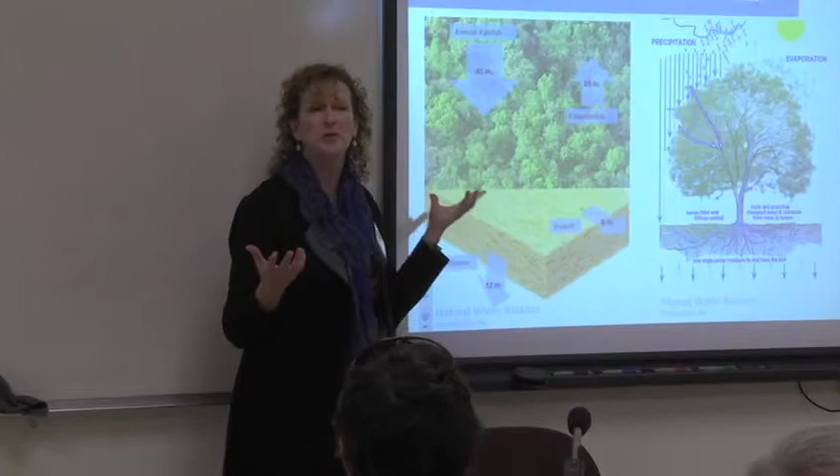I'm going to talk about this idea of green infrastructure. Our built environments are going to work like forests. Even as we build things, we're going to maintain our natural balance of water with our 45 plus or minus inches of rain and create these spongy landscapes that hold our water. Nothing works like a tree for that. So our engineering is informed by nature.

By now we're all familiar with all the kinds of best management practices we can do. We're rain gardened to death. We all know about porous pavement, reusing water in cisterns like out at Stroud, stormwater tree trenches, and on and on. We know these things are out there and we know they work. Many of us are familiar with practices of protecting things and building things, whether it's riparian forested buffers or restoring meadows, but changes in landscape and protection of natural features have a huge impact on the amount of runoff and our water quality. We know these things work too.

So why aren't we doing more of this? Why aren't we seeing this in our development projects? I'm in practice as a civil engineer, and in our firm, most of our work is related to sustainability projects. We do a lot of land development, but with a sustainable approach, like the Stroud Research Center, projects for universities, some commercial land development, but we're always working to do better stormwater, better land development.

We've learned that there are a lot of real challenges that many of you have encountered that come down to local codes, zoning and ordinances - that's a big one. Especially the stormwater ordinances, the permits and the timelines for approvals, because when you're working on a development project, whether you're Toll Brothers or the University of Pennsylvania, you have a time frame and a budget, and you have financing, and you have to move your project forward. You can't get delayed in your approval process, which goes back to codes and the stormwater ordinance.

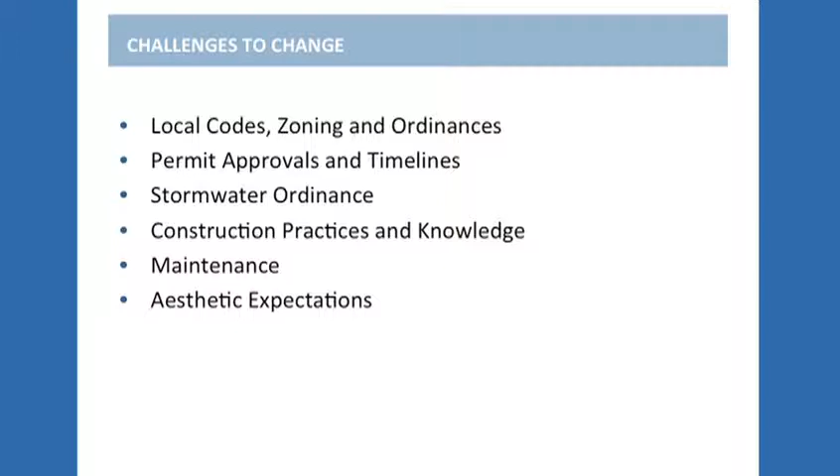And then once we get a good project design, do we have experience in the construction community on how to build things and build them properly, and then how to take care of them. And then, of course, the aesthetic expectations - what are things going to look like?

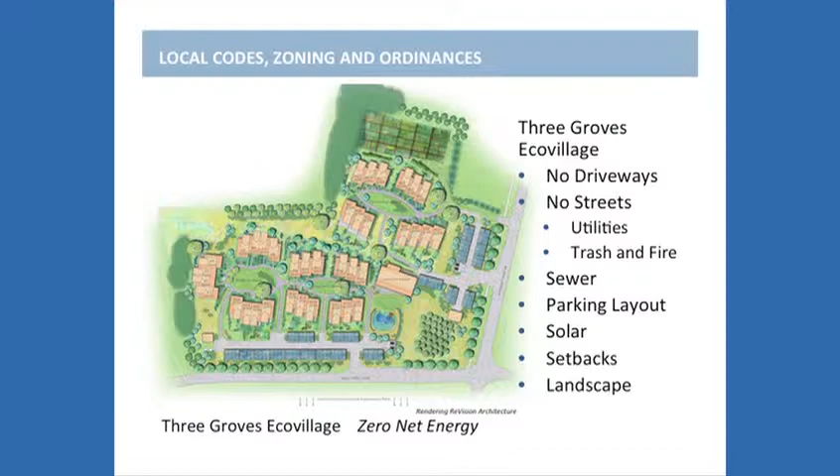Another thing is this community wanted to have the wastewater system. The local municipal authority had just built giant spray fields and a treatment system, which the spray fields are great, but they had lost a lot of their customers with the economic downturn in 2007. A lot of developments that were supposed to be built weren't built, and so they had all this capacity in their wastewater system. So they were very anxious to have a live customer who would buy sewer service. So they didn't want an on-site sewer system at this facility.

So that was a huge cost and a huge expense, and then running easements through the property for all the utilities. So these are the kinds of things that come up for real projects when you want to do something different and more ecological. This one's about to be built this summer, and they're still selling units if anybody is looking for a place to live.

When things like this come up, not just the eco-village, but the obstacles in your ordinances, I don't know how many here are familiar with the EPA SCORECARD. Is anybody familiar with this tool? Some of you, okay. This is a very good tool.

It's a rating system put together by EPA, and it's not perfect, but it walks municipalities through their ordinances, everything from what are they protecting or not protecting, to their actual codes for how we build streets, how we build lots. It's a good rating system that lets you rate where your municipality is now, and then make changes in your ordinances and come back and re-rate and see how you're doing. It's a very good working tool. So that's something that can help with the municipal ordinances.

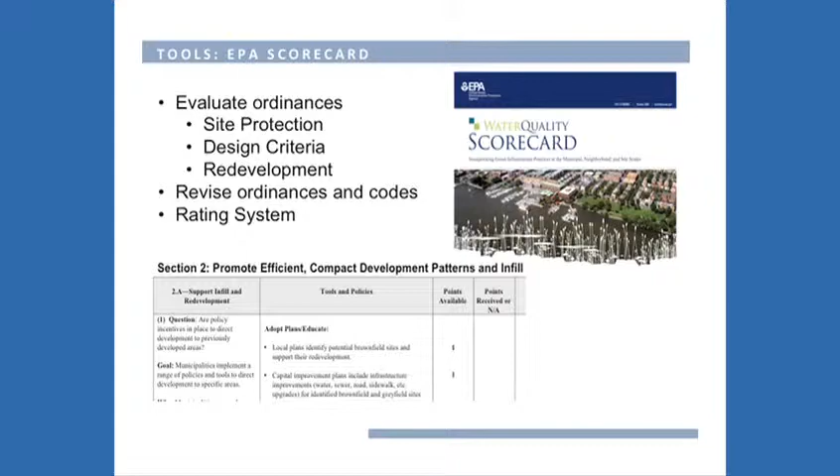The big one we see is the stormwater ordinance, and I'm going to have a few technical slides, not too many, I promise. But stormwater is a big issue with our ordinances at the municipal level, and I think, in my experience, it's the municipal ordinances that are getting in the way of better stormwater management, even in townships that are trying to do the right thing. I see a lot of people nodding their heads because they've been through this, they know this.

Even in townships where we're requiring volume control, we still have antiquated requirements for peak flow rates. And the way engineers calculate those peak flow rates is getting in our way. Now, everybody knows that if it rains really hard, the water's going to run off really fast. Common sense, potentially. But the way engineers are calculating that, we're assuming the very worst rainfall intensity, inches per hour, how fast it's raining. And we use that to say what's safe before development.

So we assume the worst condition, come up with a very high flow rate before development when it's in woods or meadow, and then we say that's what our streams and our channels can handle, and that's way more water than our streams and channels can handle. Other things, we don't get credit for better landscape practices, and a lot of places existing impervious is grandfathered. If it's already built out, you don't have to make it better.

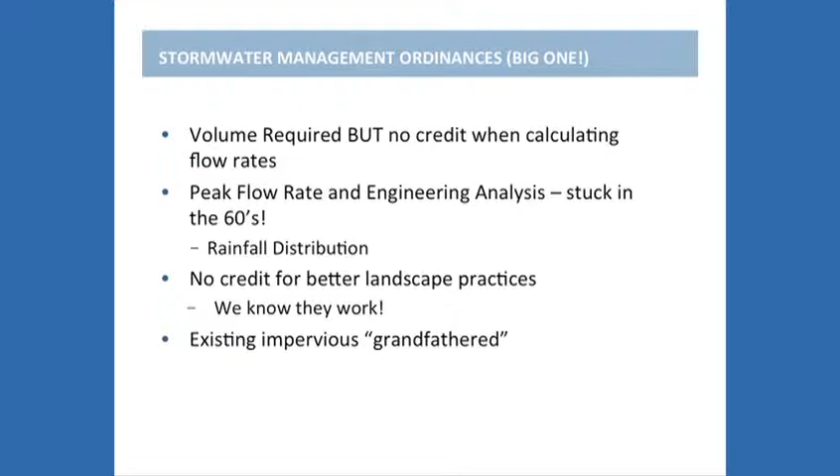So going through some of these, we're all familiar with the idea that most of the rainfall happens in the small storms, both in terms of volume and frequency, and we've recently updated this.

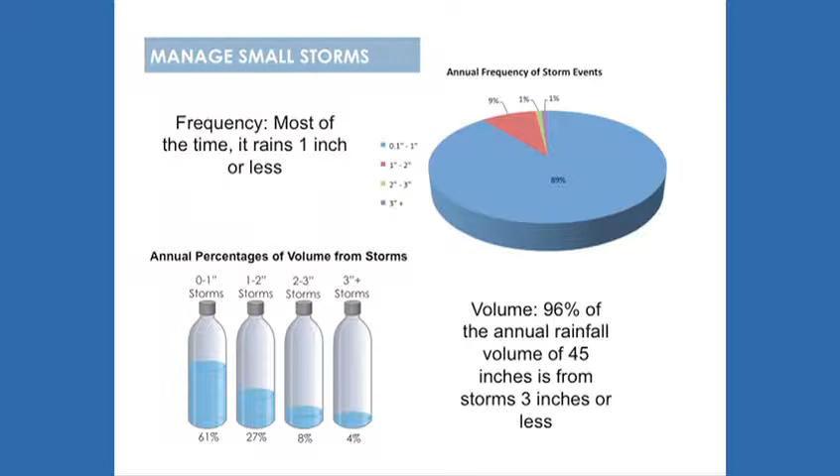Come on, screen. Huh. Okay, well, we've recently updated this with more recent data from the, come on, screen. Just touch it. Just touch the screen. Just touch it. There it goes.

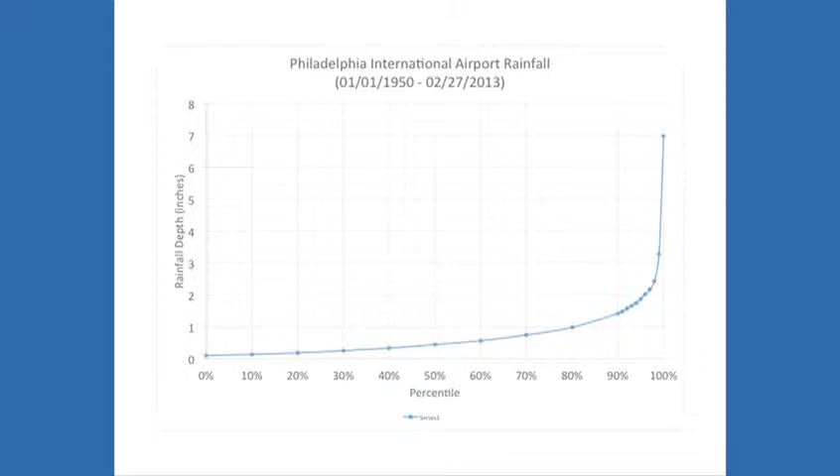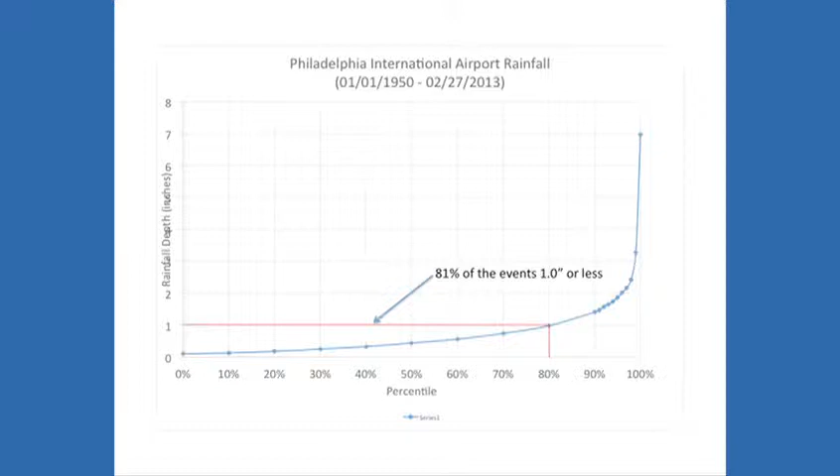It's interesting. And yeah, 81% is 1 inch or less for Philadelphia. So these are our small rainfall events that we're all familiar with. And those extreme events, you can see how far they go. And if you want to go to the next one, Clay, thank you.

But here's the problem. When we talk about these big rainfall events, 100-year, 10, 2-year, and engineers calculate flow rates, you say, okay, 100 years, 8-inch storm, but how does that rain occur? And we use an artificial rainfall distribution that basically assumes most of the rain happens in 1 hour. So it drizzles, drizzles, drizzles, rains like the dickens, and drizzles. It doesn't really happen like that when it rains.

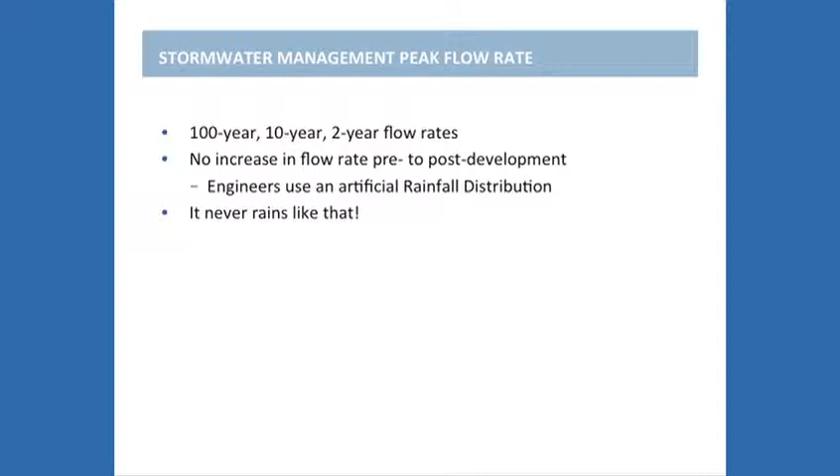We do get rainfall intensities that high, but the maximum on record is associated with something more like a 2-year storm. And if you think about summer thunderstorms, that's when you see your big rainfall intensity, not as much volume. So if you don't mind hitting it, Clay. Yeah, and going on to the next one. And so that's why we're letting too much out.

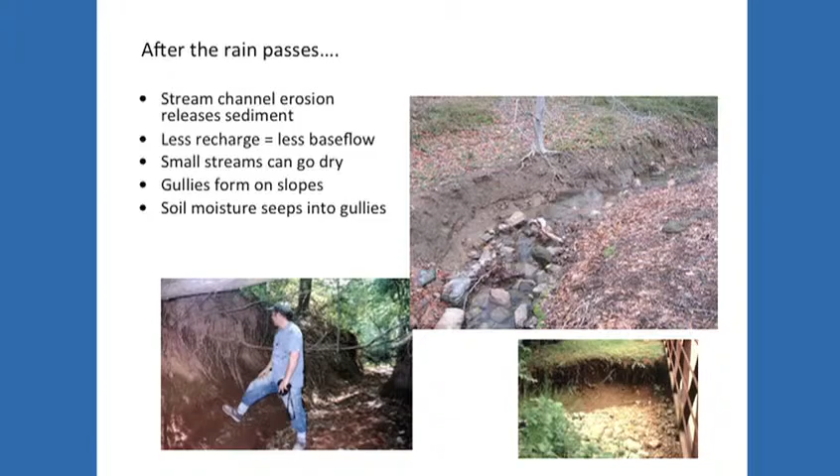Keep going to the next one, and we see our stream channels eroded. We're not being safe with our flow rates either. It's not just volume, but our flow rates for the big storms are too much. We'll go to the next one. And this has consequences for how we design. And as someone who's trying to do green infrastructure, it kills me when it has a bad impact on our projects.

So this is a project at the Mann Music Center where we had 2 big bioretention areas, but the lower one, we were required to adjust it to design for these large storms in a flow rate that'll never happen. And so the way we did that is it got pushed down to look more like a basin. So the upper bioretention area is lovely, and it's growing in, but the lower one was pushed down. And so we see the side slopes eroding, we see sediment, you can see the structures. It doesn't have nearly the same aesthetic, and it'll never fill up with water. You'll never see that thing filled up.

The engineering calculations are forcing us into designs. But we see projects doing this to get through the permitting process. Because if that's what's in your rules and you got to get a permit, you're going to do that. And so that's an obstacle we see a lot of. If you don't mind going to the next one.

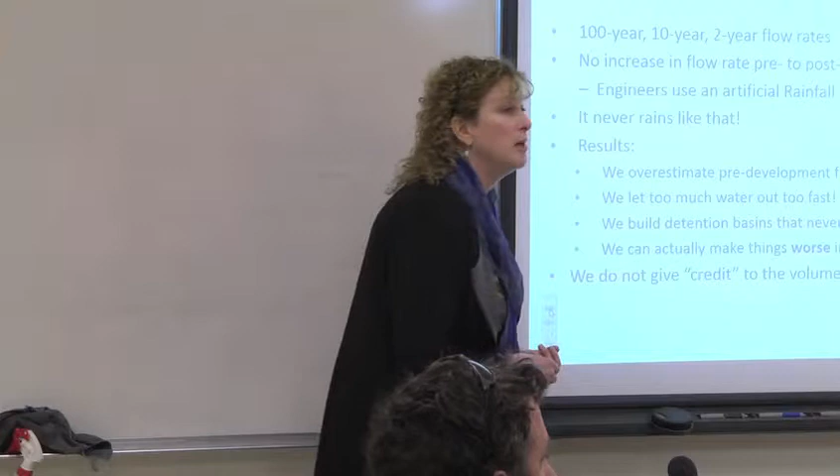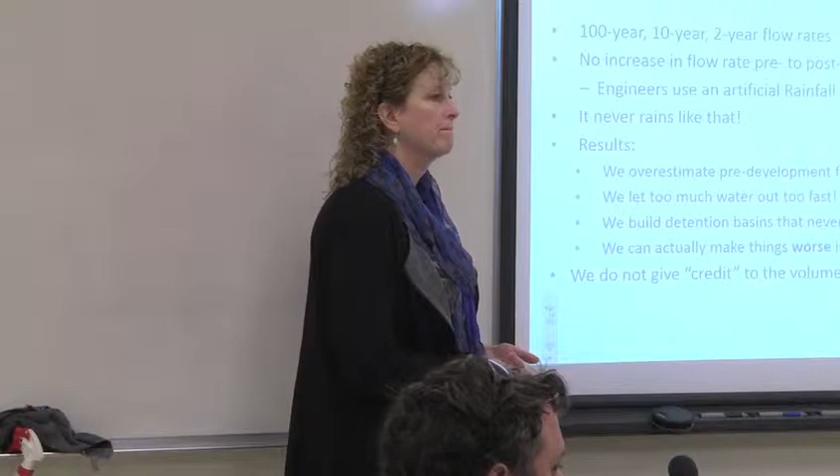Excuse me, Michele, is that in the city of Philadelphia? Yeah. That's at the Mann Music Center. You can see both of those in the city of Philadelphia. I'm sorry. Yeah, at the Mann Music Center in Fairmount Park. Could you just say again what it was about the one that's not performing? That the code said one thing and it's not really performing. The code, well, it's performing.

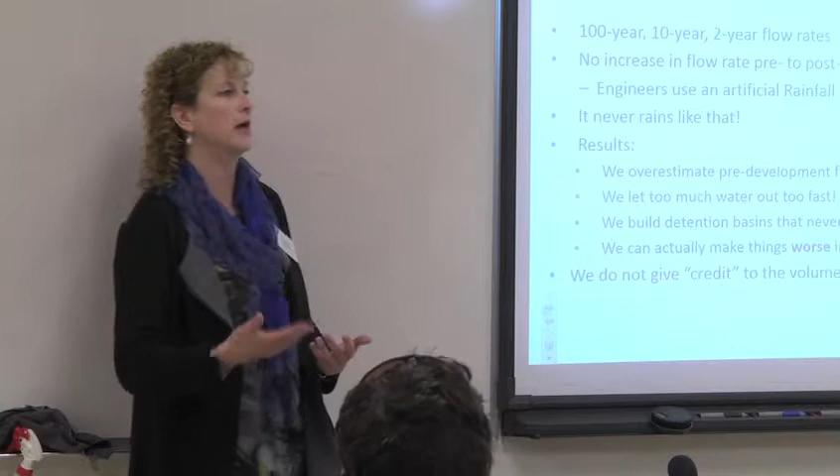It's holding volume, but the code said we had it designed for these very high flow rates that never happen in reality. And the engineering methodology, the way engineers calculate that, forces a big basin. And so we got a bigger basin by pushing it deeper. We see that all the time. And then the sides are too steep. And then in construction, it eroded on the sides, and the plants didn't do as well. All those things we see over and over again in actual installations are coming out of our engineering codes, I think. Oh, yeah, Shadi.

Then the Mann Music Center probably comes to you and says, come back, this isn't working, fix it. This is ugly. Yeah, this is ugly. So how do you handle that? What do you do? Well, we don't have a way of fixing having to make it deeper. We can come back and make the plants a little better. We can do plants that grow higher, so you hide the ugly sides.

But if you don't mind going back one more, Clay, sorry. Thanks for jumping in and being a tech assistant.

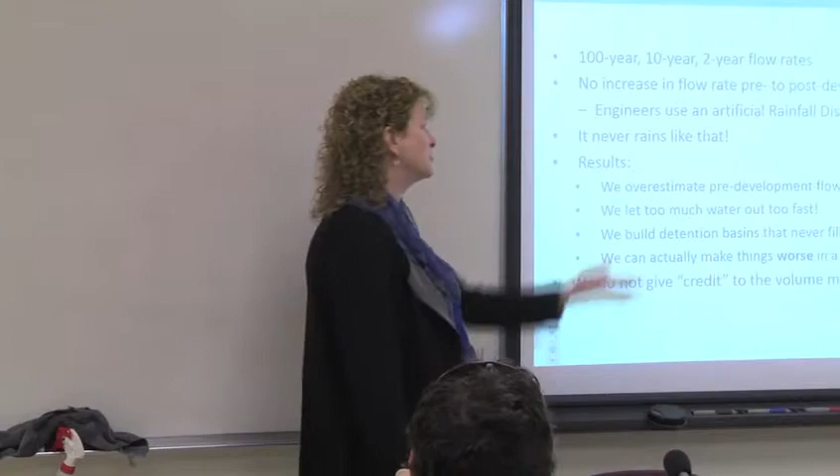If you can see the difference between that and that at the same project site, and the client wants this, putting in bigger plants is going to make that harder to maintain, not the same aesthetic. And this is right on the drive as you're driving into the Mann, so it's very visible. And they want it to be a nice landscape. So this is a real challenge. If you're trying to stay in business as a designer, you don't want your projects to be ugly. You won't get more work.

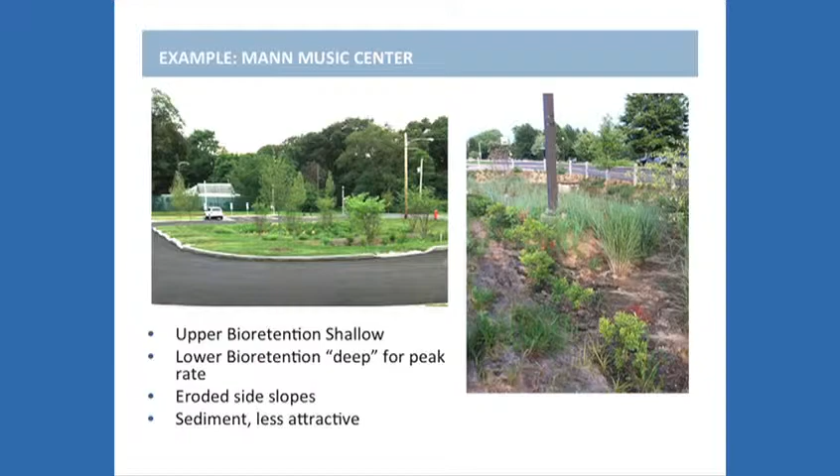So an alternative to that one, not that we shouldn't push back against the silly codes, but an alternative to that is it would have to have a bigger footprint. Right. Yes. So you didn't get the storage by having a deeper system. Thank you, Joe. And if we made the footprint bigger, this is at the bottom of an existing parking lot. It was a retrofit. They would lose more parking. They could not lose more parking. So that's a great question. These are the real things you bump up against in real projects.

So, thanks, Clay. And the other part is when we do all this volume management through our BMPs, we don't give credit to that volume management when we're calculating our flow rates. You calculate your flow rates as if there is almost no volume management. They're kind of separate universes. If you don't mind going to the next one.

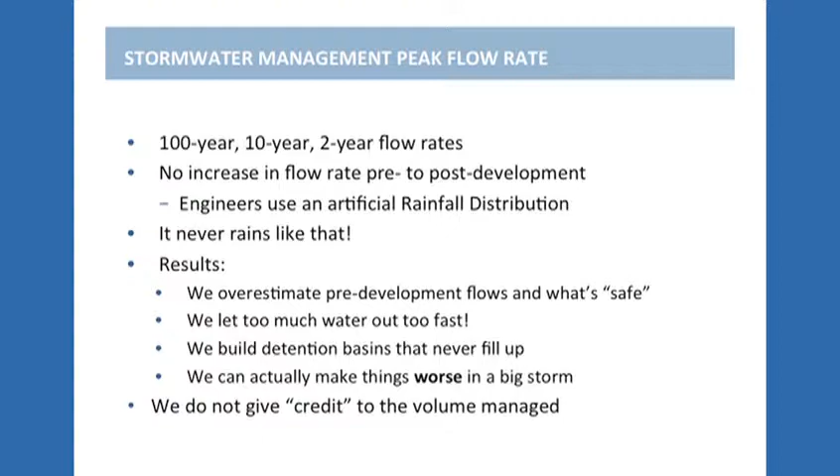There are ways to overcome this. The state of Maryland has done a good job. They came up with a method to work within the methodologies that engineers are used to, the curve number method, and they have lookup charts, and as you have your percent impervious and you start managing your runoff volume, you get to adjust your curve number on these lookup tables. So even the engineers don't have to do the math, they can use lookup tables.

And the goal, that's important, the goal is to get to a curve number which represents your land use that's closer to forest in good condition. And if you get to forest in good condition, you're good. You don't have to do a lot of your flow rate calculations, your peak flow rate mitigation, because you've managed your volume well. And they've also brought the storm down. They don't usually take it up to the 25, 50, 100-year storms. It's not perfect, but it's helping.

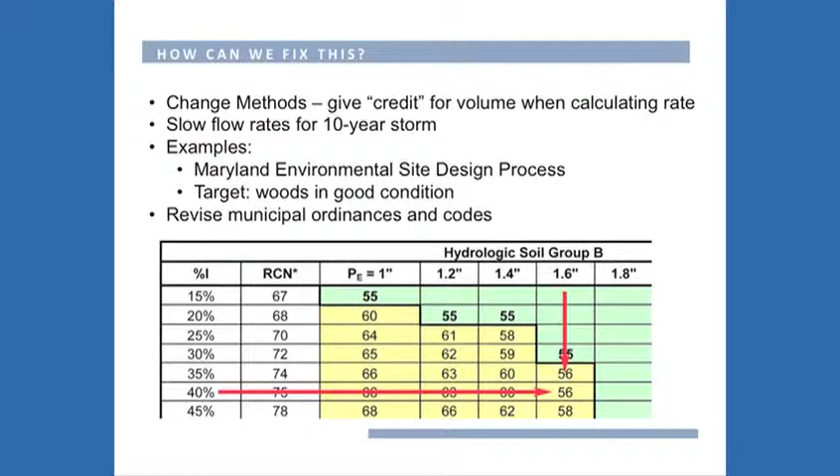Any chance that this might come to Pennsylvania? Well, hopefully. You know, there's this committee working to update the manual by volunteer methods, and Dominic Rocco at DEP has been involved, and we're proposing that Pennsylvania bring it into the manual. It would still need to come into the municipal codes, because as a designer, when you go get your permits, you can get a permit from DEP, not too hard, I don't want to offend anybody. Getting your municipal permits is hard. So you're gonna defer to the municipal rules. So we have to change municipal ordinances. That's a great question. Yeah, Wes?

And would you go so far as to say that because of this perverse peaking methodology and set of requirements, it actually starts making the whole design, including achieving the volume control, that much more difficult, maybe even absurd, certainly more expensive, and so it really perverts the whole design process?

Exactly, Wes, because you know this exactly. It perverts the design process, and you end up spending time and money and construction costs on things that aren't needed, that aren't ever going to do anything. The Eco Village project I showed you at the first one, we proposed using this alternative methodology. DEP was good with it. DEP said, yeah, let's give it a try.

The municipality said, we're really worried, we don't want to be liable, we don't think so. What we did in our office is we did the modeling and we ran actual hurricanes. We said, okay, here's a design storm, but here's what would happen if Floyd happened again, if we designed it the way your code said. And we showed it would actually make things worse. And the municipal engineer said, Uncle, okay, do it your way, can't be worse.

But it's hard for engineers and owners to do that. There's no money to do that.

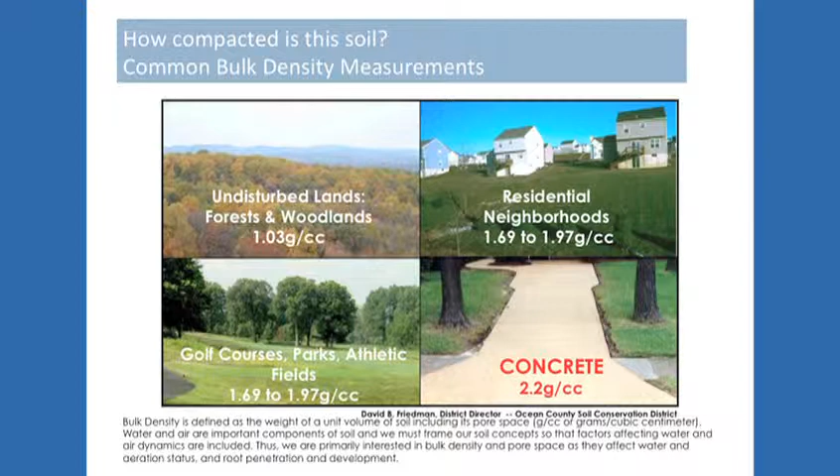So another important thing, our landscape practices. In our engineering methodology, we don't give them enough credit, and we know they work, but it isn't represented when you do the math to get your permits. We treat them all the same. And we don't take into account the fact that uncompacted soils, woods, and good landscapes absorb water so well, and our golf courses and lawns are almost as compact as concrete. They don't absorb water.

An example I'll share with you is down at the University of Pennsylvania. This is an urban example. This is the new plaza Penn built between the Palestra and their stadium. It used to be all impervious and tennis courts, and they built a whole new plaza there. It's quite beautiful, and it has to follow the City of Philadelphia stormwater requirements, which are very rigorous and very good.

So it had a number of goals. This is actually a SITES pilot project. If anyone's familiar with SITES, it's very much like LEED. It's a rating system, but for the landscape. It's a great resource, and it also has a lot of requirements about site protection and site restoration and understanding your resources. So SITES is a great tool. This is a pilot project.

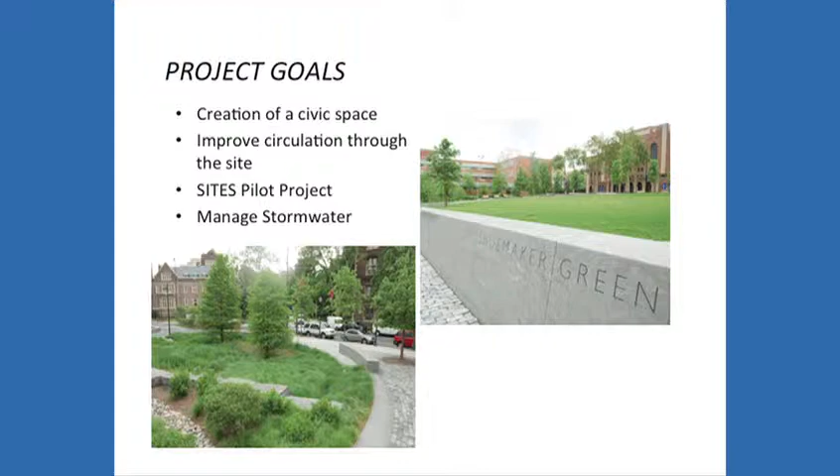So a little bit of history on the site. It's in Philly. It had been row houses before it became tennis courts by the Palestra and the stadium. There were the tennis courts right there. It's right near the Schuylkill River. You've got this landscape, the train tracks, and the Schuylkill River.

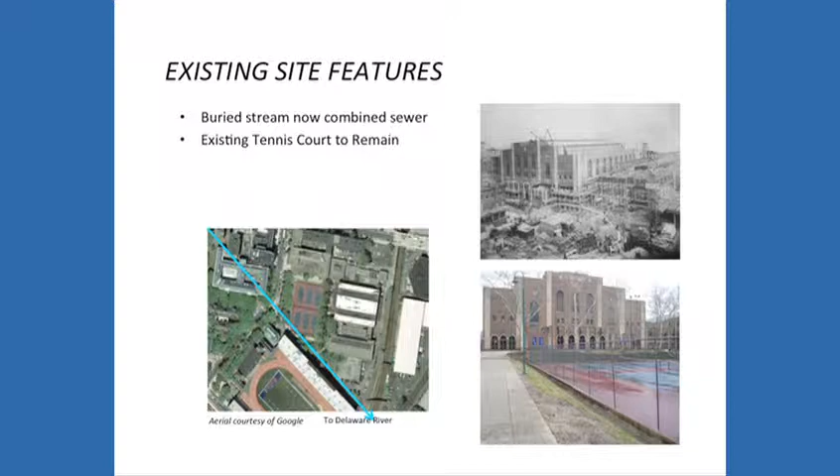It's on about 30 to 40 feet of rubble and urban fill. So when we looked underneath the tennis courts and we saw 40 feet of imploded buildings, and you could literally stand there with a fire hose and water would go away, we said this is not a place to infiltrate, because the whole thing will start settling if we start putting a lot of water here. So the whole system is lined. It does not infiltrate. There is a liner and one pipe out underneath. And there's what we saw.

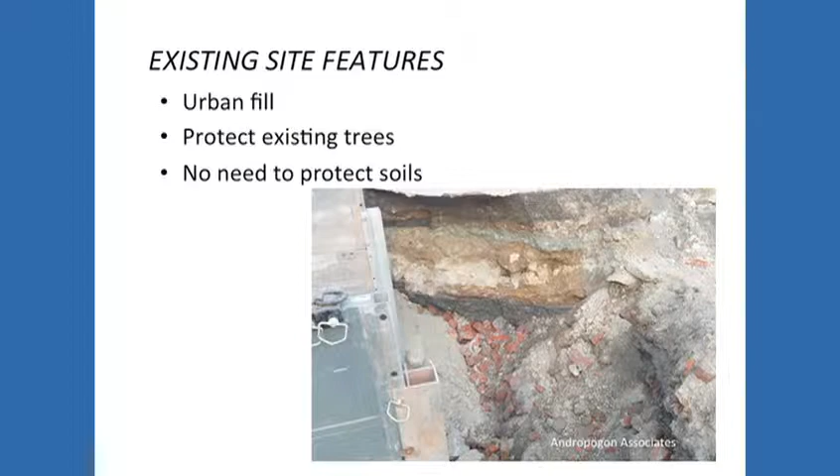There were some trees we wanted to protect, and this is urban environments. This is what you see when you dig under the ground.

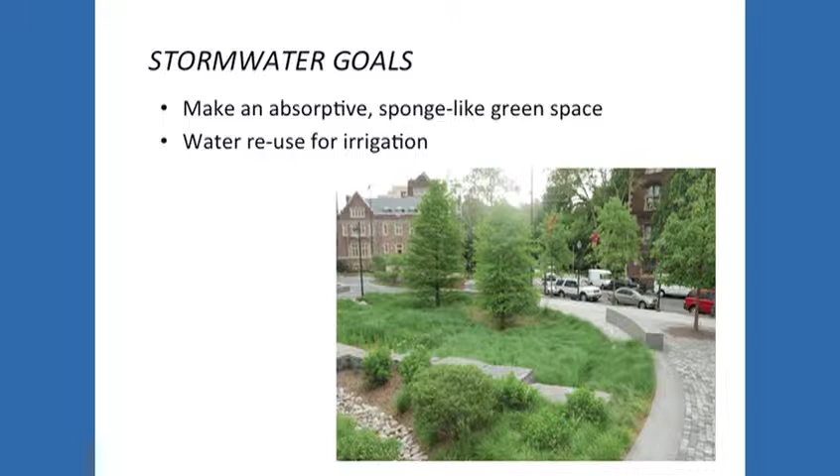So the stormwater goals were to make a sponge-like system and to hold water and reuse it for irrigation. So we have a number of components.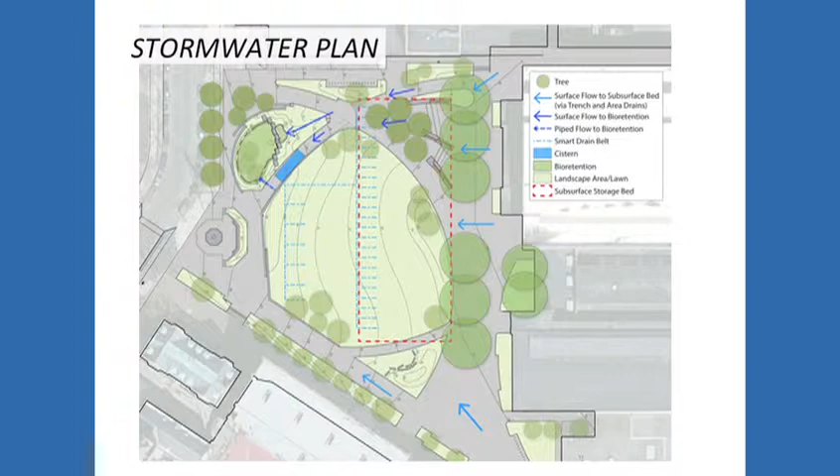And there was no soil, so it's a made soil. It's sand and compost, completely artificially constructed. And they added organic components, fungal components, so it's a made engineered soil, because you don't want to bring in topsoil from someplace else, since you're taking that resource from someplace else. And there's a cistern for the water to be reused and recirculated.

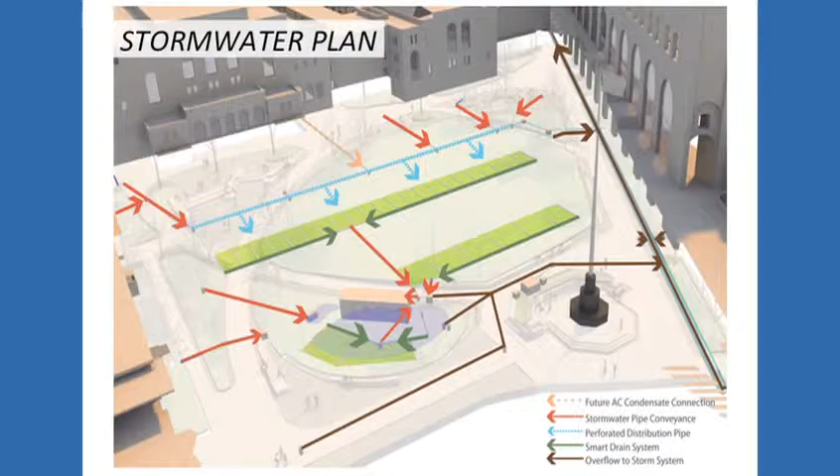And so this is just showing in 3D the plan a little better, with the distribution system and the cistern. And this is just taking the different components as you go down through the layers.

The rain garden's at the top. The rain garden, interestingly, as beautiful as it is and as photographed as it is, does almost nothing in terms of meeting regulatory requirements. It gets almost no stormwater credit in the city of Philadelphia.

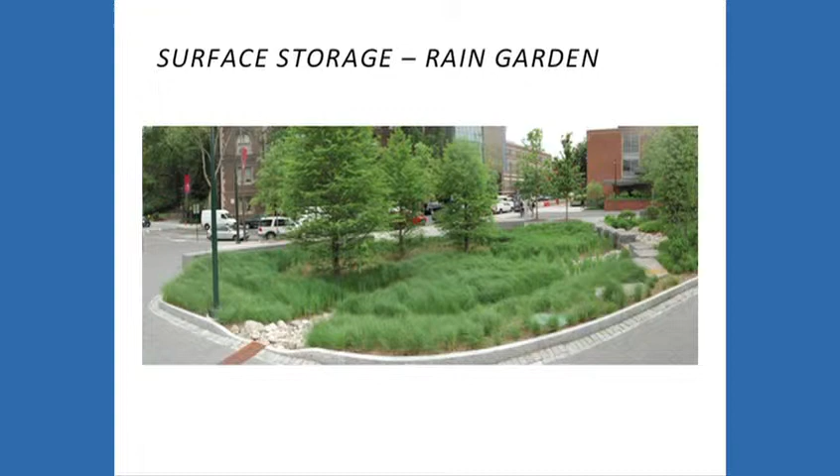We had a very hard time getting through our permitting process, and Penn, as a university, had a schedule. This had to be open for graduation. They'd had some similar experiences on other projects, and so you have a client as good as Penn who wants to do the right thing, but they have a project they have to open on time. So you get to a place where you want to have a beautiful landscape, but you end up doing underground storage tanks and things like that to get your permits. This is the reality. This is what gets in the way of good green infrastructure.

And there's just another shot. But this landscape, and there's tree trenches, yeah, that's fine. You can go all through this, is incredibly absorbent. And so it's been in place for a little over a year now, and it's got a liner underneath of it and one pipe that leaves it.

And Penn is monitoring the system. They're monitoring the soil, they're monitoring the discharge, they're monitoring the rainfall. And what they've found is in an entire year, there's been no discharge from this site because the only time there was a discharge was when the irrigation system was broken and the pumps were on. But it's holding water, pumping water around, and it's this giant sponge that evaporates. There's no discharge. It's grossly overperforming the calculations for the permit, but that evaporation really gets no credit in getting your permit.

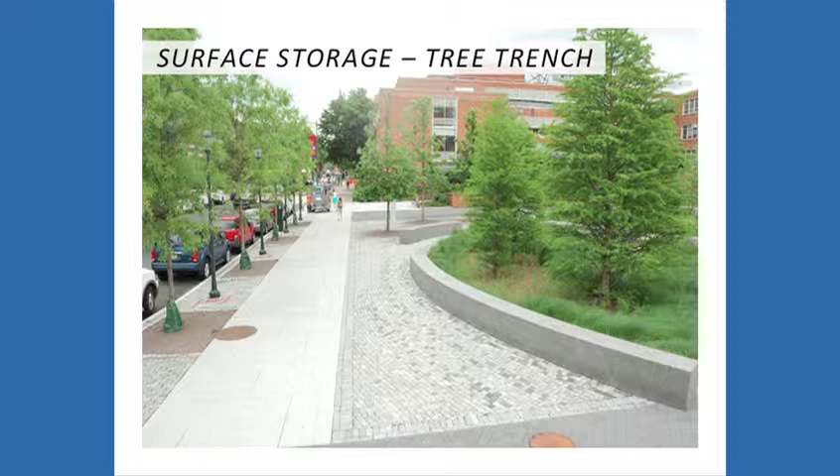And so until we close that gap of how do you quantify the benefits of something green like this when you're doing your engineering calculations and getting a permit, you don't see enough of this. So this is another obstacle. I see a lot of heads nodding. I get the feeling you've all encountered this before.

There's a little diagram showing the made soils, the stone bed, the bed underneath. And we use something called a SMARTDRAIN system. If you don't mind going to the next one, Clay.

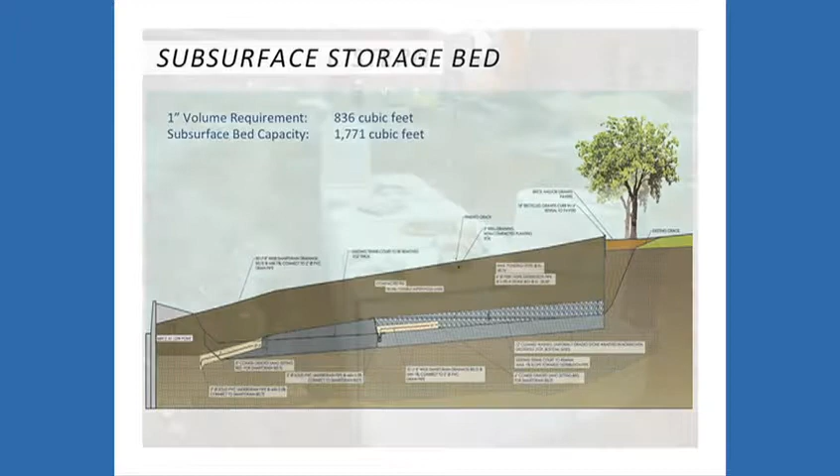But this is a SMARTDRAIN. This is the SMARTDRAIN system. These are plastic belts that work by capillary action. And so what they do is they pull the water out of the soil, but very, very, very slowly. So we've found this to be a good tool at having systems that drain, but drain very, very slowly. But this was something new to the water department, so getting that through the agencies, getting that accepted and approved is another hurdle when you want to use new technologies.

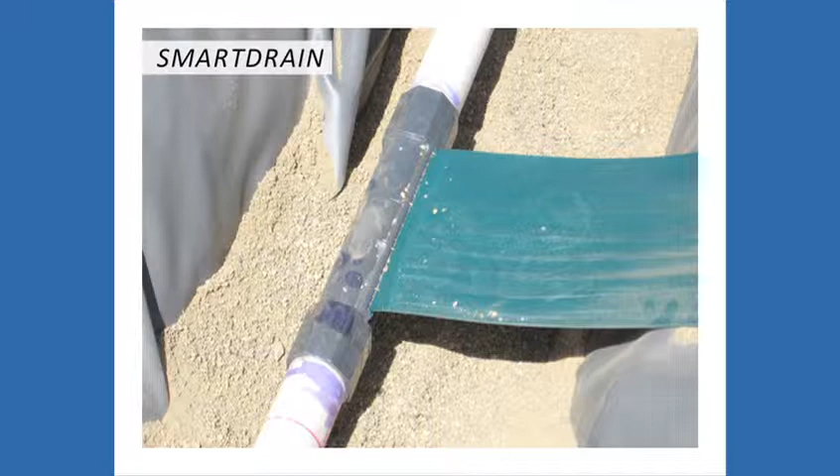If you go to the next slide, it shows the soils. This is how the SMARTDRAIN system works. We've used them on a lot of systems now. Is it an osmotic technology? It's capillary action. This is a plastic plate, and underneath are all these little grooves, like a plastic strip. The grooves pull the water by capillary action, so they can really be essentially flat. It was developed for golf courses and athletic fields. But in doing that, you are able to discharge, but very, very slowly. It's very powerful that way.

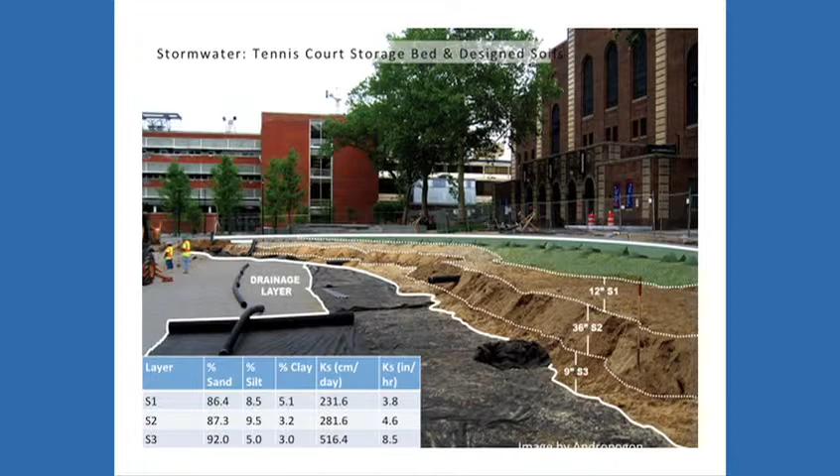And it's doing a lot for stormwater, but Penn to date hasn't gotten credit. And we didn't get credit in the permitting. Hopefully through monitoring, the campus will get more credit. A question about mowing that lawn and whether that increases compaction. What did you do about that? It is a mowed lawn. The soil scientist, Tim Craul, who you probably know, has a gradation of mostly sand particles with organic.

And the sand is graded so that it has a structural capacity without getting compacted, on these made kind of systems, when you need a lawn, because sometimes you need a lawn. So that's a good question.

Question, do you know the percentage of sand to topsoil? It's mostly sand and organic material, and Tim has a lot of that available. What we were seeing published was some of the mixes are 85% sand, high sand, 13% compost, and 2% soil. And very little soil, yeah, with different gradations of sand.

And actually, there's another source. The City of Seattle has done a lot of research through the University of Washington, and all their specifications are available on their webpage, looking at different gradations to make a lawn that's absorbent and drains. They also use the same soils for bioretention areas.

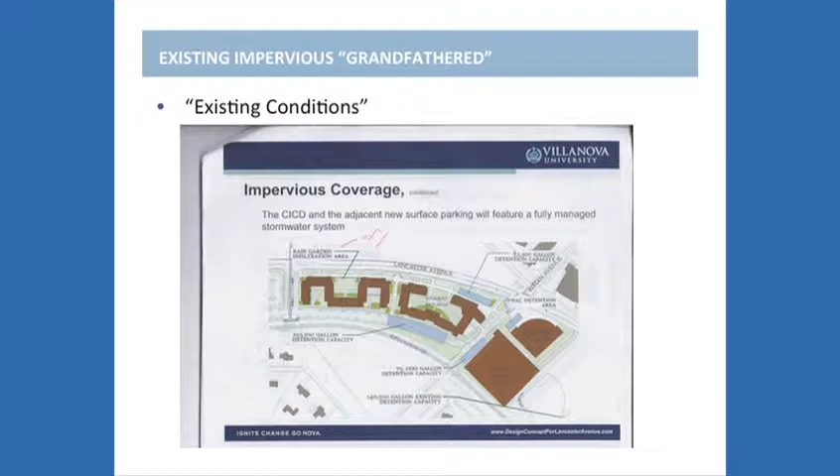The community and the Riverkeeper have been very involved in this, asking Radnor to get rid of grandfathering for existing conditions, and to manage volume, not just peak rates. We don't need more big detention facilities in the Darby, we need volume management. So that's a real issue with ordinances.

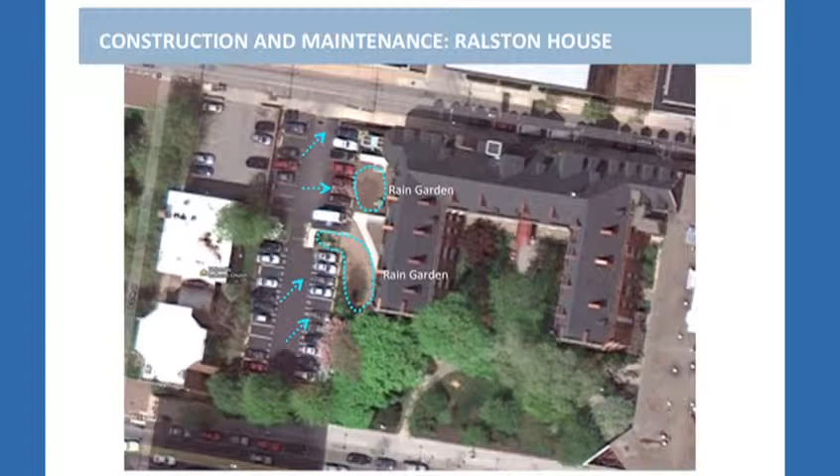So I'm going to jump over to issues related to construction and maintenance. This is a project built a few years back in two phases near the University of Pennsylvania, the Ralston Center on Chestnut Street. It's a community organization for an aging population, providing social services. Because they're very tuned into community and ecological issues, they retrofit their parking lot to put in some rain gardens.

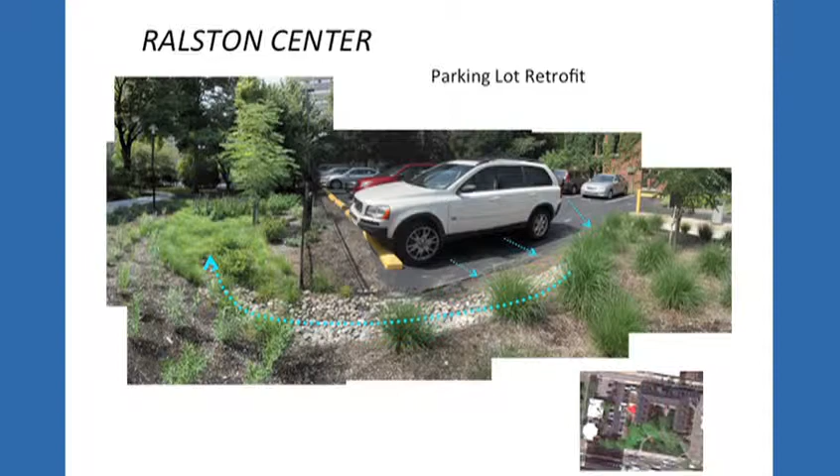And those worked pretty well. This was a retrofit for an existing parking lot, changing the landscape to make it absorb water. It continues to work, but we see that maintenance crews put in too much mulch and never take the old mulch out, so it piles up and affects drainage. We see this a lot. Maintenance crews need training that old mulch must come out, and the type of mulch matters, so water can actually get into these systems. They tend to dam them off with too much mulch, and there it is, growing in.

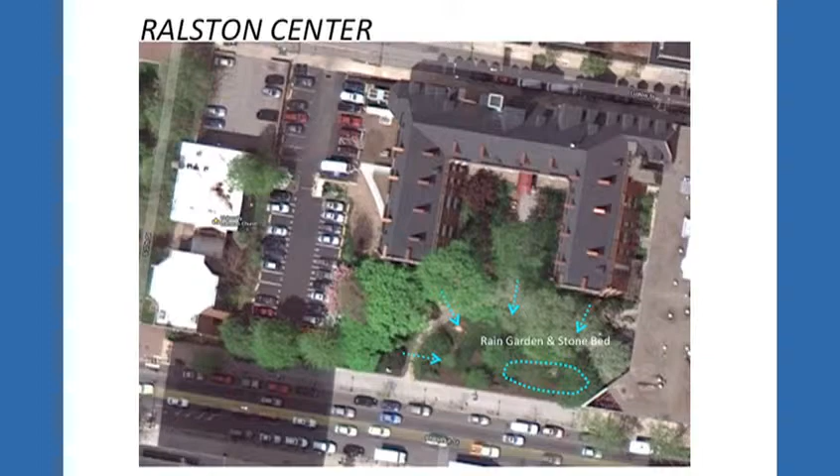They did a second project in front of their facility, retrofitting a rain garden out front. While they were putting it in, two things happened: the contractor wasn't very experienced with green infrastructure, and Hurricane Irene hit, followed by Tropical Storm Lee. So they didn't do a very good job with their erosion and sediment control measures, or with keeping their site protected.

They put the rain garden in with a stone bed underneath, and there's a stormwater inlet connection that serves as an overflow. By not having good construction practices and not keeping erosion and sediment control measures in place, too much fine sediment washed into the rain garden and formed an impermeable lens a couple inches down. You could go out to this puddle, poke a stick through it, and it would gurgle and bubble as the water went down. We see that a lot when things aren't built right.

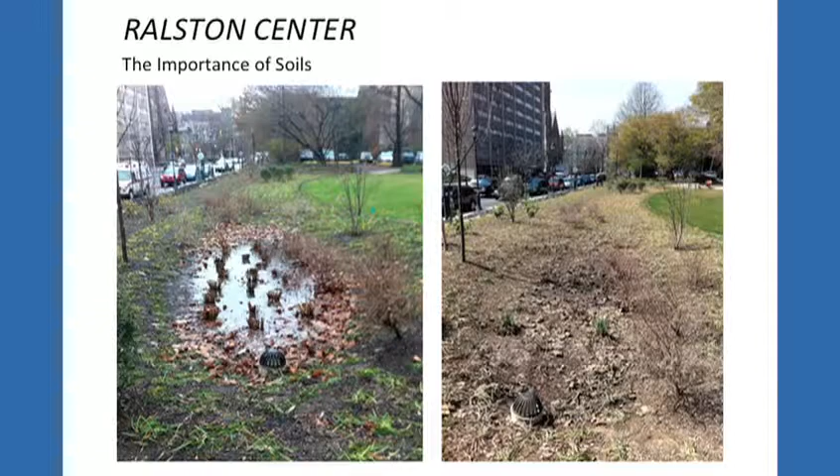The way this was fixed was to come back, dig it all out, take that material and mix it with more sand. When they restored it, it started working fine again. But that was a construction problem and an erosion and sediment control problem.

We see a lot of that. Property owners don't like to pay their engineers to be out at the site doing inspection during construction. Once they have their permits, they say thank you, have a nice day, goodbye. But if nobody's out there making sure the contractor builds things properly, they don't get built properly. We need more inspection for green infrastructure, with design professionals out there overseeing construction. If nobody's watching, you can't always count on the contractor to build it right.

Another project with similar problems is a new fire station, built in Philadelphia. It has a green roof on top, which is why it's green, a parking lot, two bioretention areas, and lots of meadow.

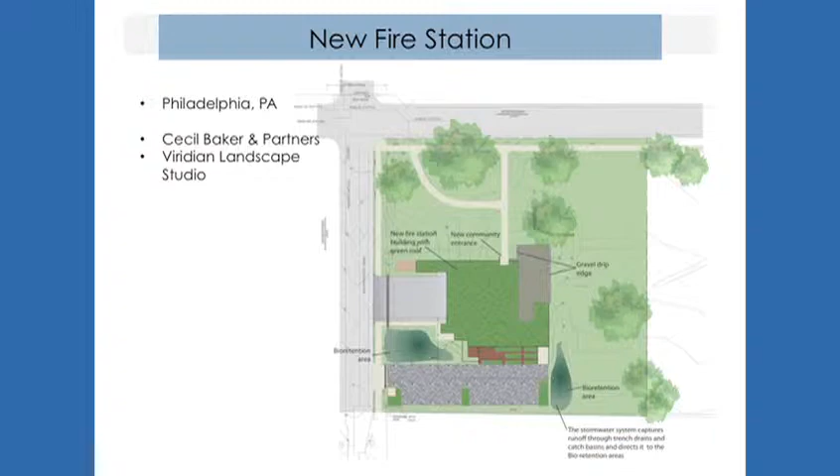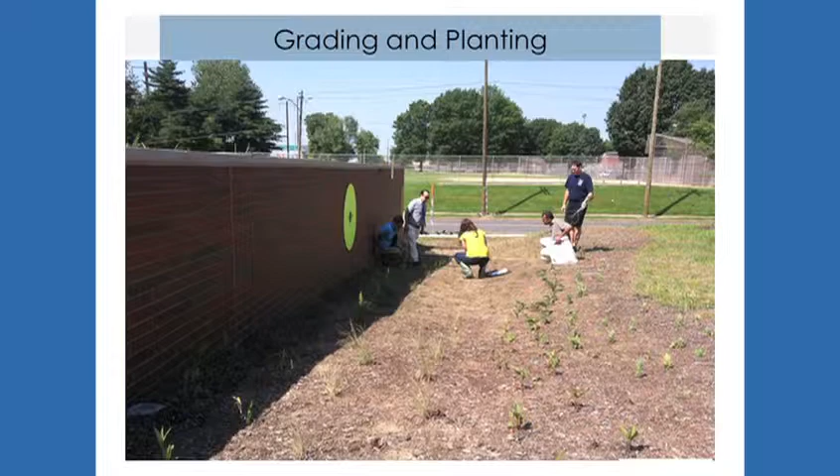But they didn't quite get the construction right, with many trades coming in and out. This is a publicly owned building going through a public building process with the Department of Public Property, which has ways of doing things that aren't very contract-friendly to alternative designs, whether a green building or a green site. Contractors didn't get the grading right, so an area that was supposed to be graded and densely planted was not. That area eroded, and runoff went right into the rain gardens.

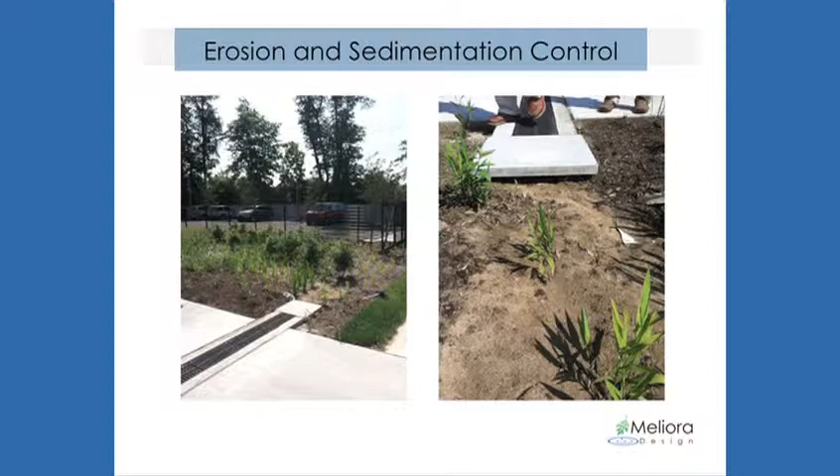Rain gardens got filled up with sediment. So again, you get a lens, keeping your water from draining. These are construction problems because nobody was out there watching during construction.

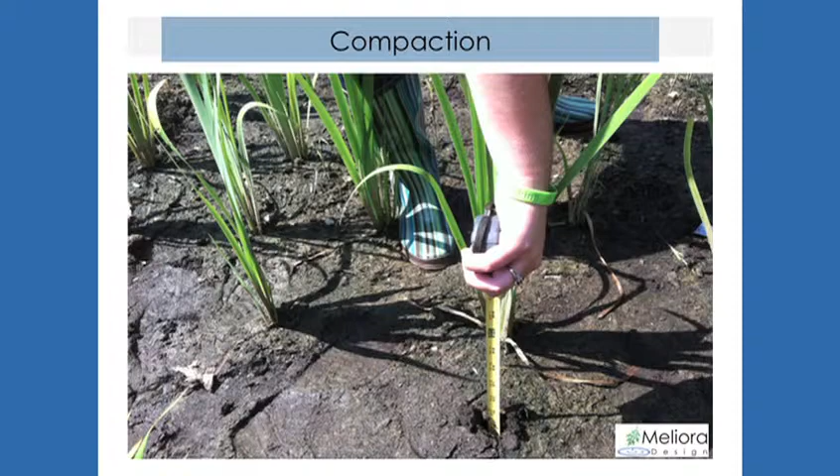Compaction occurred during parts of construction. Getting the specifications right with the soil, they finally did get the soil right. We rejected the soil mix seven times before the contractor got it right because it's something different. They're not used to it.

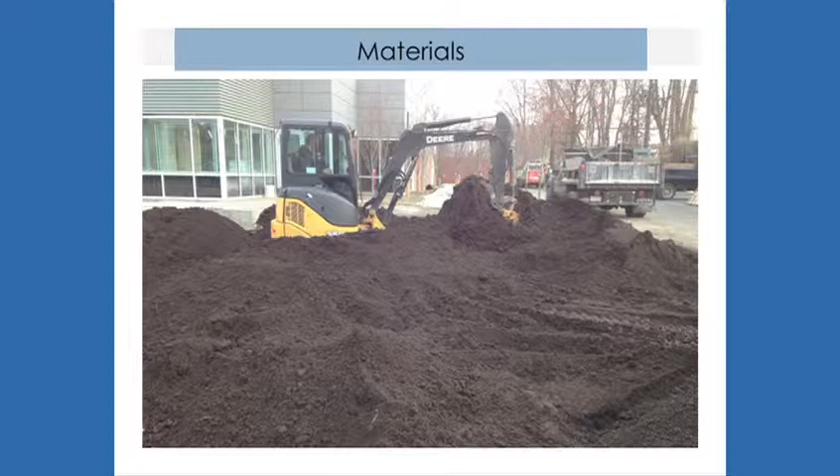You can see the guy working here, it's kind of a mess. He's got his equipment right in there and there's stuff everywhere. The end result is that it wasn't working well, and it grew in too densely with a lot of weeds.

Weeds grew in without maintenance, and the firemen are very, very unhappy because the firemen take great pride in their facility. They get rated and ranked by how good their facility looks. They wash and shine their trucks. They love their building, but it's important to them that their landscape be well addressed.

So the City of Philadelphia Water Department is now intervening to go out and work, now that the snows have cleared, to help the fire department fix this and then learn how to maintain it. But that gap has led to unhappy firemen and an ugly site, an ugly rain garden out front. So that one's not fixed yet.

Would they have another option of just making underground storage instead of that? Well, they could have, yes, but then that's not very green. Then all you have is hidden, out of sight, out of mind, and it is expensive. It's not out of the maintenance budget though, that's the... Not as much, but if we're talking about changing our landscapes and creating a green city in Philadelphia and elsewhere with our alternative practices, we don't want to just bury things and hide them. We want the landscape to be credited and we want it to be built right so it works.

We're going to get back to that sponge landscape. So if you don't mind going to one more, Clay, I don't know how we are on time. This is one that was done right. It happens to be a Riverkeeper project.

This is over in Haddon Township, New Jersey. This was led by John Leisted of the Riverkeeper. It gets about almost an acre of municipal roads taken onto rain gardens built at a local school that was having erosion problems in the woods behind it.

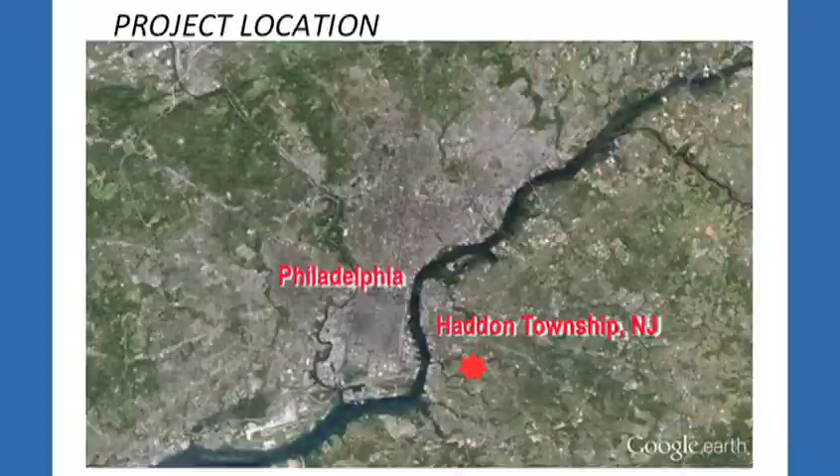So here's, I think this animates if you hit it. The water coming down the roads and from the parking lot all comes in, and this is where the rain gardens were created. This is Saddler's Woods, a really remarkable stand of old growth woods in Haddon Township, New Jersey, that has very steep banks that were eroding, not unlike Crabby Creek and places like that.

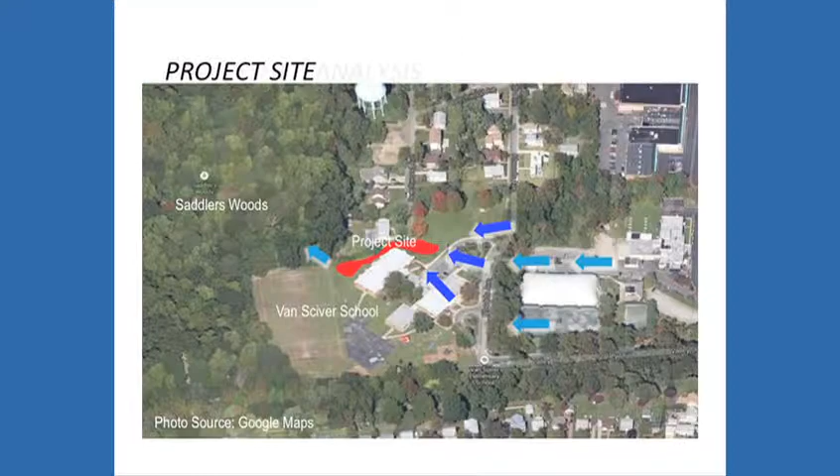So the idea was to capture the water and protect the woods and manage the community water. And then it goes into the woods. If you hit this it should animate, this just shows you what's happening. Oops, no, it didn't animate, but that's okay.

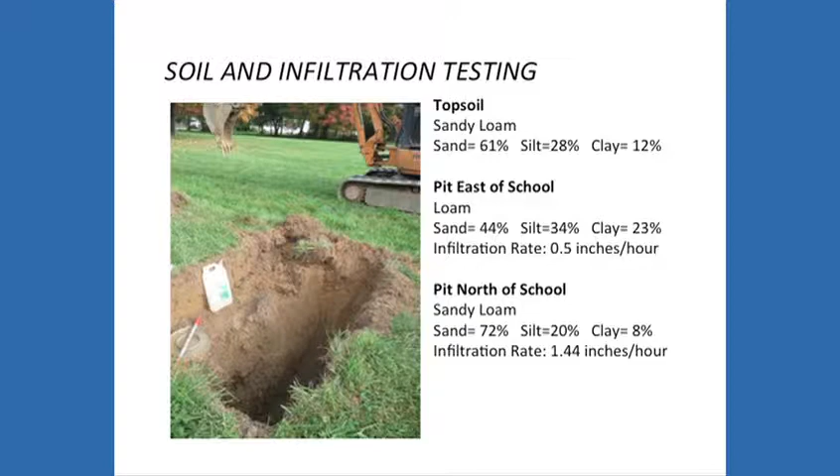Keep going. So we did careful soils tests for infiltration to see what we had. It wasn't all great infiltration everywhere, so creating an absorbent landscape was important. Some was good, some was so-so. Pretty high clay in parts of the schools. The soils were moved around.

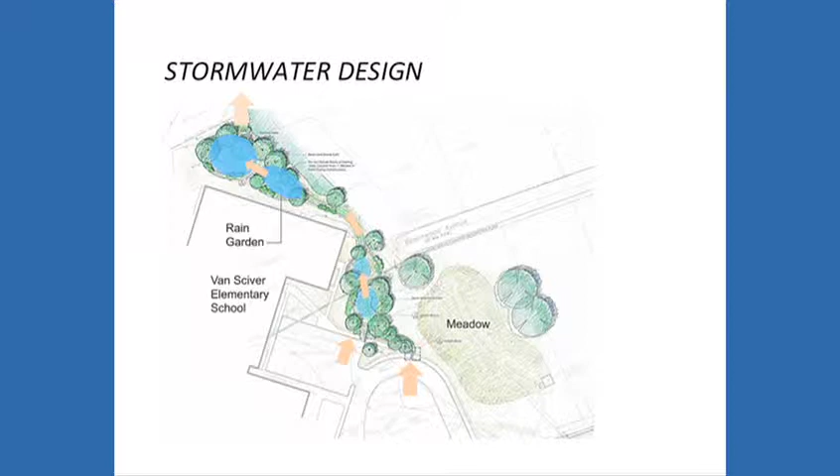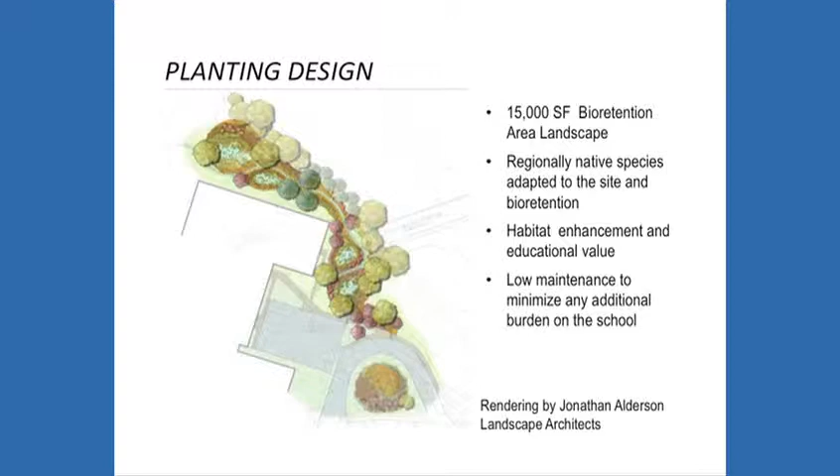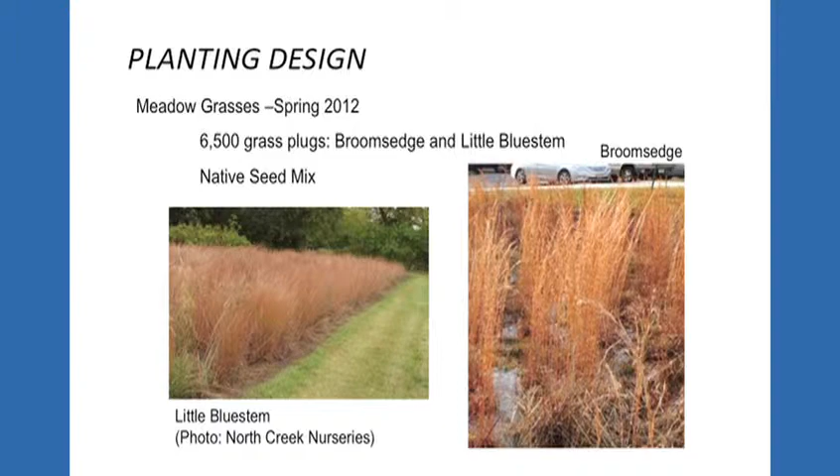Let me get to those slides, because on this one we had a very good contractor called Think Green. They actually did much of the landscape work at Stroud as well. We have meadow grasses, very simple design, so the maintenance people know how to take care of them. It's one design, they can tell what's a weed, what's not a weed, and they can mow it.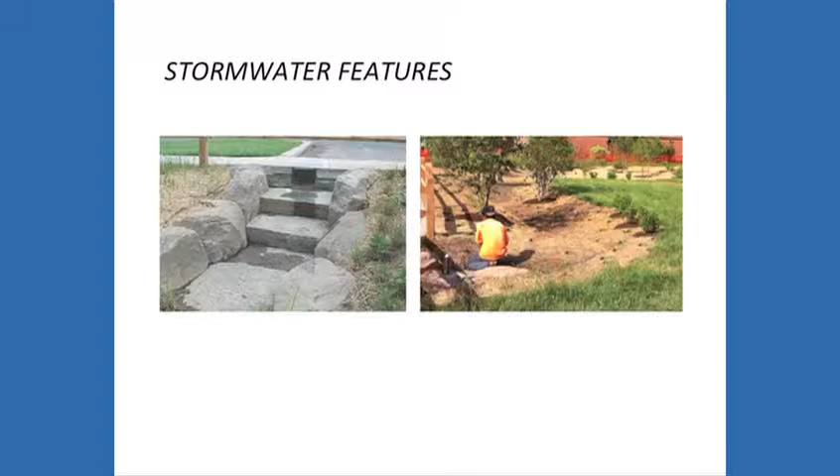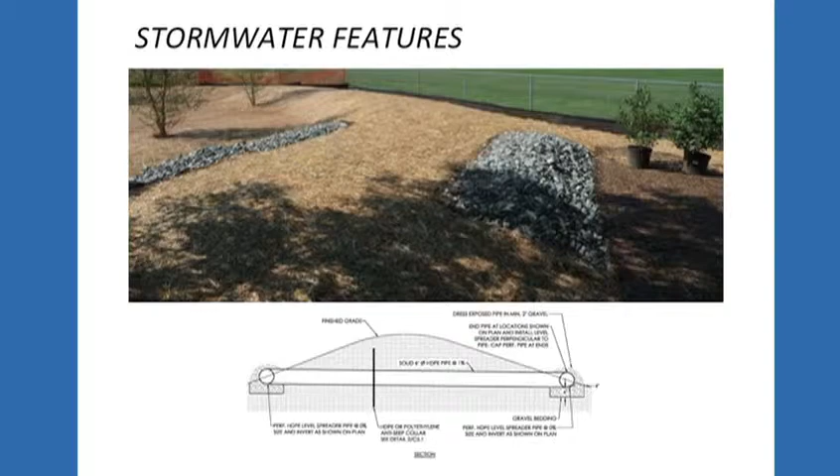Putting the stones in, getting your grading right, so your water works the way it's supposed to in terms of water levels and flows, and that's what it looked like when it grew in. And this is the level spreader. This is at the very end, the level spreader that disperses the water into the woods without a point discharge to cause erosion.

And they were in the middle of construction and a 10-year storm hit, not unlike the other site at Ralston House that had problems. Because this is reality. You're in the middle of working and a big storm hits. And we had massive flows run through the site the day they were supposed to do much of the planting.

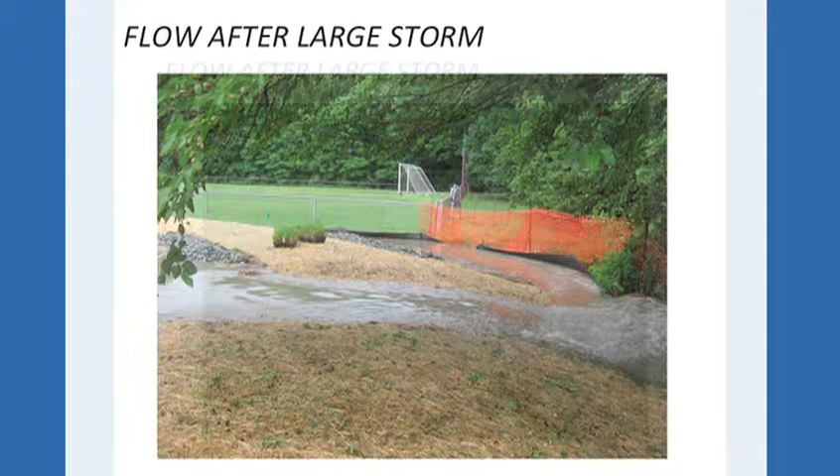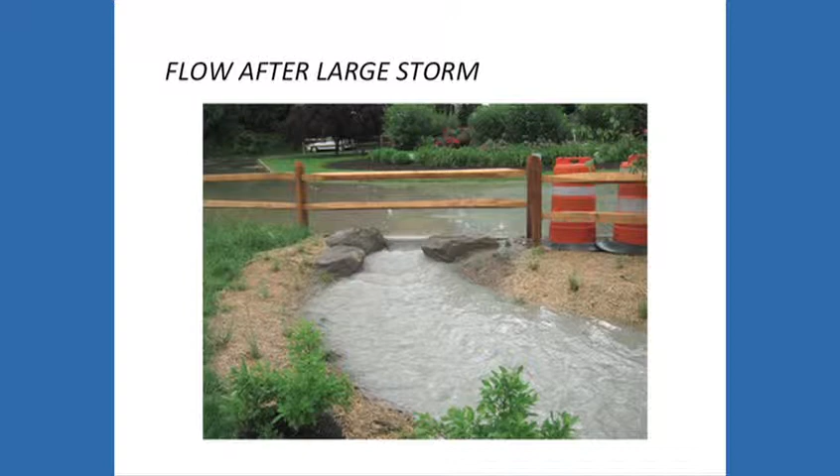But if you go to the next one, Clay, I didn't put the video in, but we had huge flows rushing through, but nothing eroded, nothing washed away. No sediment got deposited because the contractor knew what to do. We had it on our drawings, and we had a knowledgeable contractor. This is what happened as they were planting, and this is just rushing. You could almost run a little raft through there.

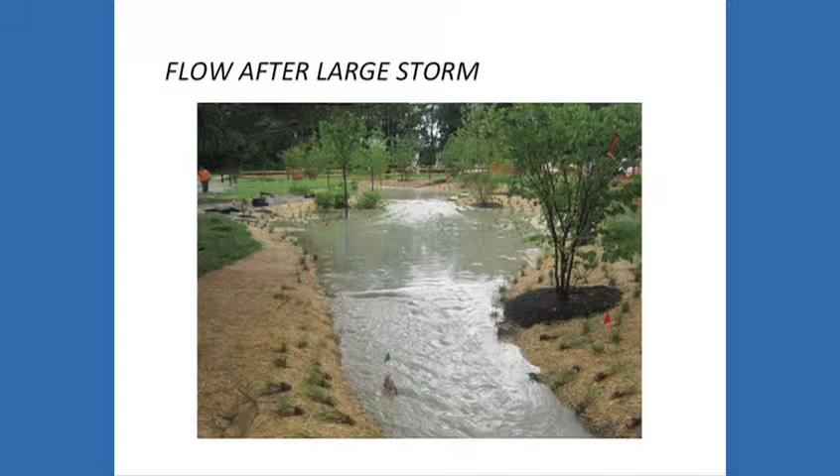And part of that was how they staged their construction. They worked from the back forward, and as they stabilized things, they brought their organic material in, and then they worked forward so they weren't compacting their organic material. So very careful staging of every component, not just knowing how they put the materials in, but how they stage it. We usually put that on our drawings.

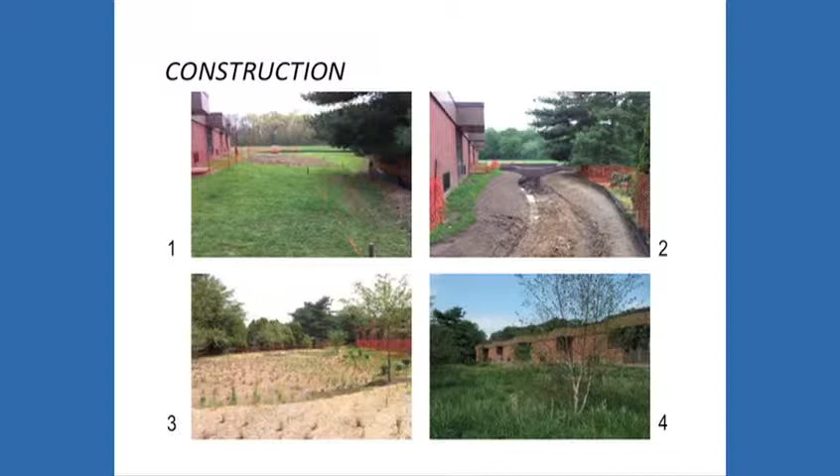Contractors don't always follow it, and most firms don't. Princeton Hydro, Biohabitats will put it on their drawings, but a lot of firms don't document that level of detail for construction, so things don't get built right. If you go one more, you can see he's working his way forward with the planting, with the mulching, and then the volunteers came in, of course, and one more, just a finished shot. This is actually John Neisted, from the Riverkeeper's son, walking across the little berms.

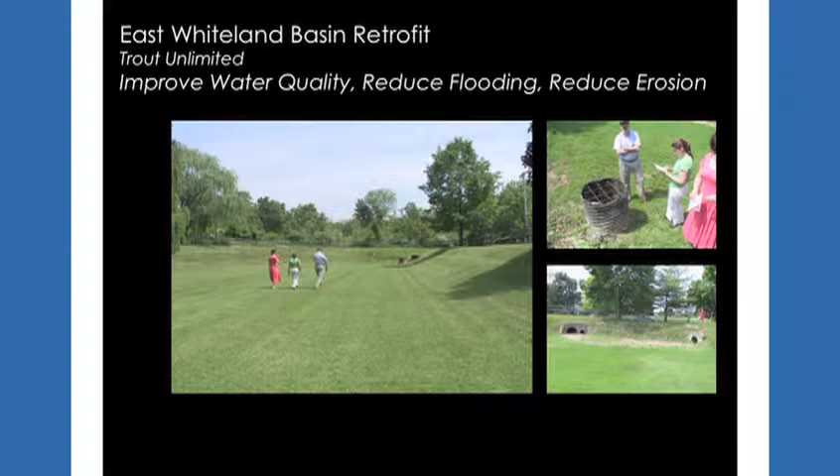And then, if you keep going, yeah, more post shots. These are the shots everybody wants, of course. The last one I'll share with you, I know some of you are familiar with this, was the Trout Unlimited led detention basin retrofit in East Whiteland. This goes back to 2006 when the basin was retrofit from a mowed detention basin to a stormwater basin that now everybody forgets used to look like this not that long ago.

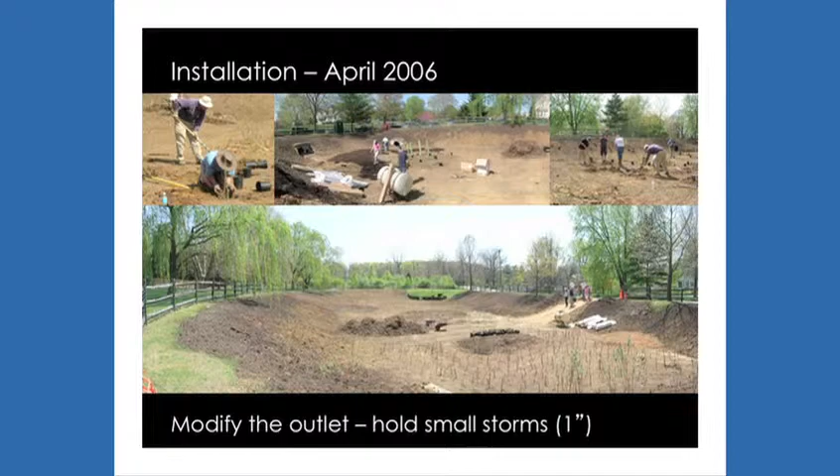And this went through a careful process of installation, creating the basin so the meanders occur, fluffing up the soils, the twig plantings of willows that have grown in quite well. But we use the small plugs to make it cost effective for this kind of planting. If you go to the next slide, the critical component was the maintenance stage as it was establishing. And I know the TU guys talk about the site assessment and the weeding for the first 3 years until the native plants could establish. It could look quite messy until it got established, until the township learned what they had.

But here we are, summer 2010. This is my friend Tavis Dockwiller, the landscape architect, out there in the basin, waving now that it's a meadow. But here's where it got interesting. We got a call about then from the township, from East Whiteland, saying, "What the heck? You guys told us this would make life easier. You said we'd have to mow it twice a year and we'd save all this money. Our guys are spending hours out there." So we went out, and it turned out the maintenance crews were so enamored of the flowers that had come in that they were carefully clipping as if it were Longwood Gardens.

We said, mow it all down, it will come back, it's okay, mow it. It's meant to be mowed. And they said, okay. Twice a year they mow it. But managing those expectations and the long-term maintenance is critical. The landscape architect did simplified first-year, second-year, and long-term maintenance plans. We put these on 11 by 17 sheets and we laminate them, so facilities like this know what to do now.

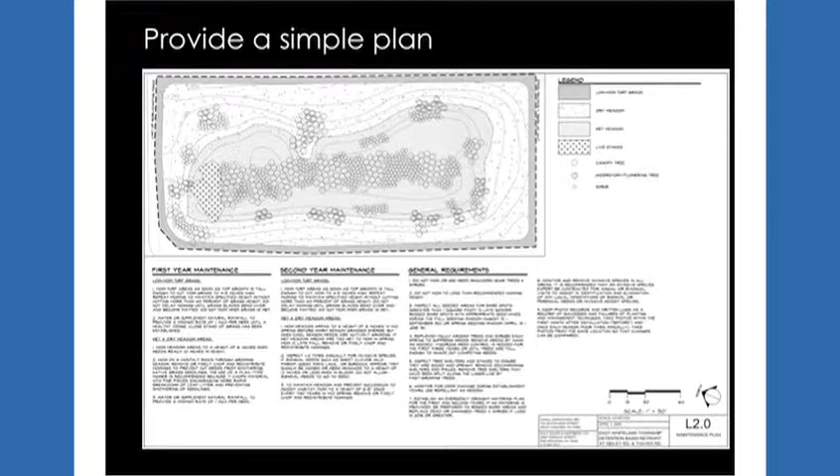And then the last one is things like the mowed edge, allowing a mowed edge so that there's a level of comfort between the mowed areas and the natural areas. Now that it's like this, the community's pretty much forgotten it ever was mowed. It's accepted. So with that, I'll wrap it up if there's questions. But these are the obstacles we see to getting to all these great BMPs that we talk about. Why don't we see more of them?

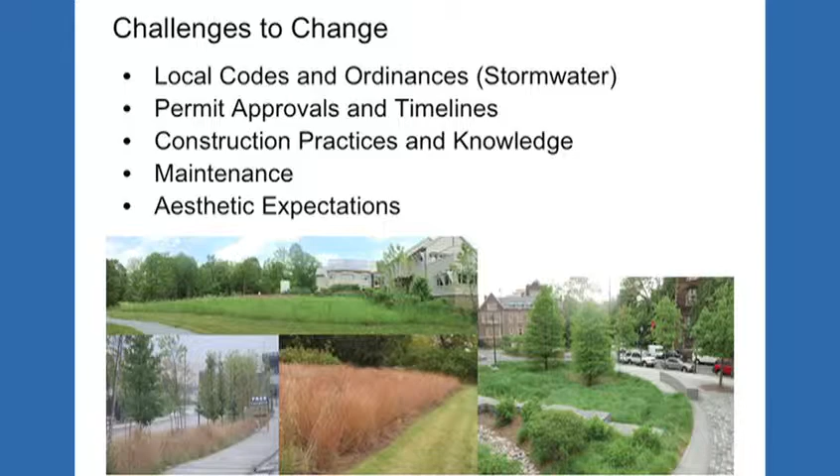Wes and I worked together back in 1983 on one of the first porous parking lots at Great Valley Corporate Center, and that's 30 years now, and I thought the whole world would have changed by now. So these are, yeah.

Could you talk a little bit about your thoughts on Act 167s? I'm in Berks County, and I get the impression that it varies by county and area. In Berks County, that's where our municipalities are getting their stormwater ordinances, and we decided to encourage joint regionalization and planning. Do these really need to go back and be examined?

I think they need to close the peak rate calculation issue. That's where I see we're continuing to propagate. It's not that we're not worried about floods. We have to worry about flooding, but it's in our engineering methodologies that we need to close that gap. So we might be able to close it in the context of some of the existing 167 ordinances if we could alter the methodologies like Maryland has.

If we gave engineers different tools, and we have to make those tools available to the municipalities and their design engineers. They have to be accepted in the engineering community. So, yeah, if we don't fix it, we're propagating the problem.

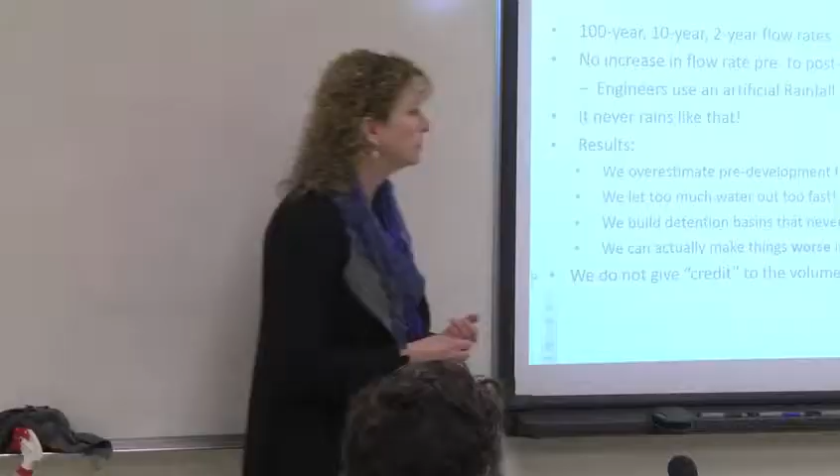I want to address the West Nile question. In Chester County, we met with our health department just a few weeks ago because there is a concern. The health department is saying that the areas they have found that have been retrofitted or gone back to a more natural-like state are more attractive to the species that carry West Nile virus. And they are recommending that basins be mowed.

Going backwards. So what do you do now? And they're doing that from actually going out and surveying and sampling and coming back and finding. I've heard that in Bucks too. So the easiest thing, I think the mutual compromise, because they understand the concept, they say, yeah, we don't like the mowed appearance either, but this is what we're finding.

So their recommendation to us was to make sure that when you go back in and naturalize, any wet areas, it would be best if you put in the mosquito dunks and some type of insecticide, because you're still going to have to address the concerns of those individuals who see that standing water, and the first thing they think is mosquitoes. They're saying it would be best if, when we talk to them about naturalizing their basins, we, as Conservation District, also recommend that the dunks be used.